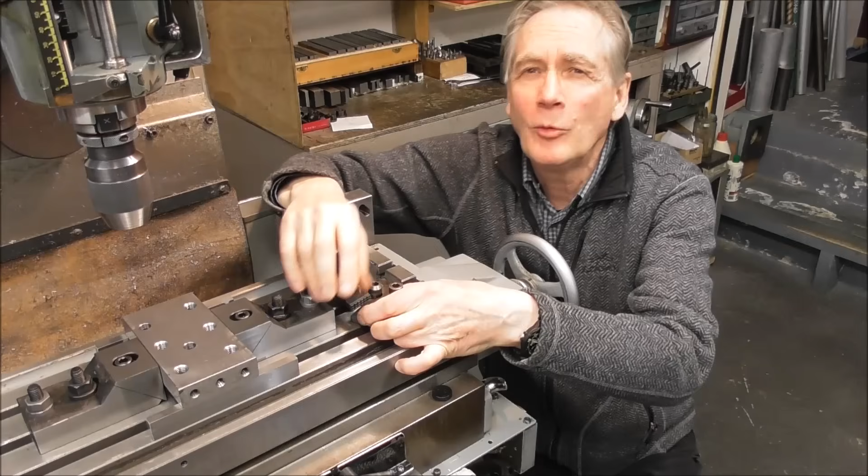In this video I'm going to go into making this edge clamp set or two-part vise. This one here, this was a previous one in a previous video. There'll be some machining tips and tricks, and you might be considering building your own. So follow me through the different stages of machining up these parts.

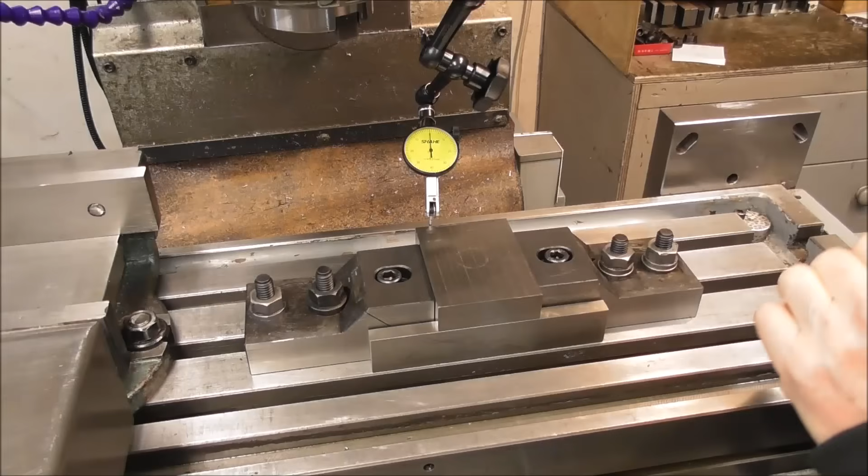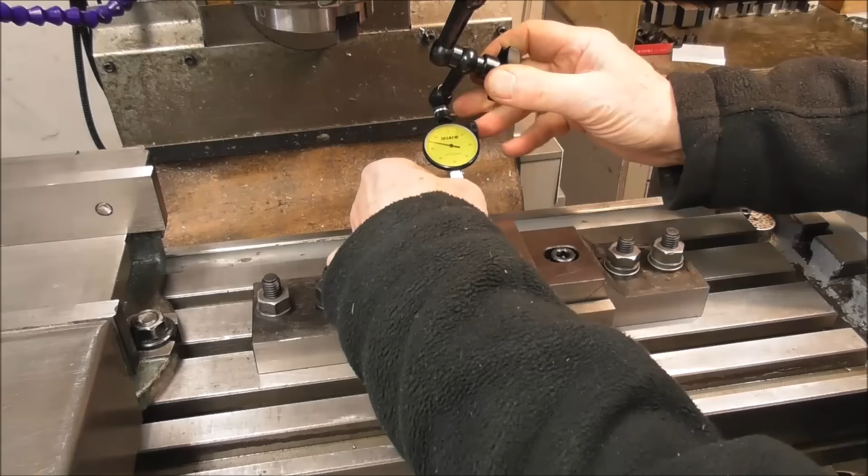Let's dial that in and test it. Yeah, so it's stayed square. It's really accurate, just like a conventional vise. What about pulling down onto the parallels? Well, I'm pretty sure that's going to be fine as well. Let's just stick that on 0. That's great.

Oh, I wish I'd made one of these years ago. I would have used it all the time. In fact, in many ways, it replaces a vise. There are a few situations where a conventional vise would be superior, but this is far more versatile. It can hold such long parts.

It holds the parts right down on the table if you want, so you've got more height under the spindle. It's just so versatile, and it pulls the parts down with both jaws onto the table or parallels. It's got all of those advantages over a vise, and it's accurate and holds really well. So I think it's fantastic.

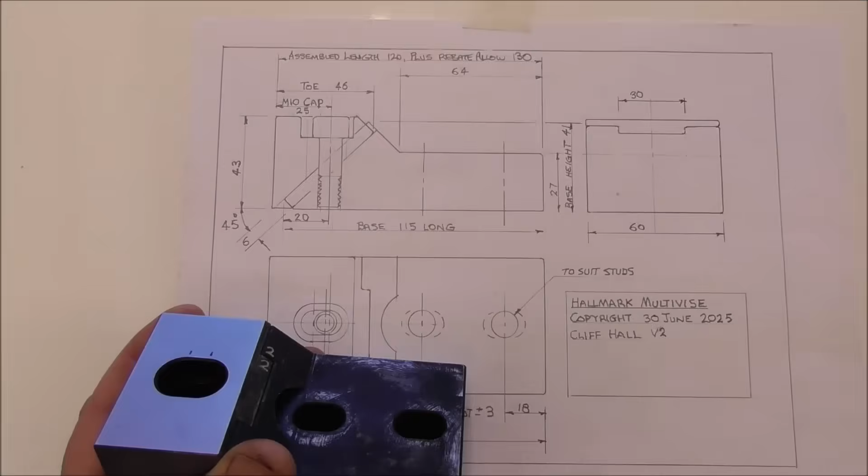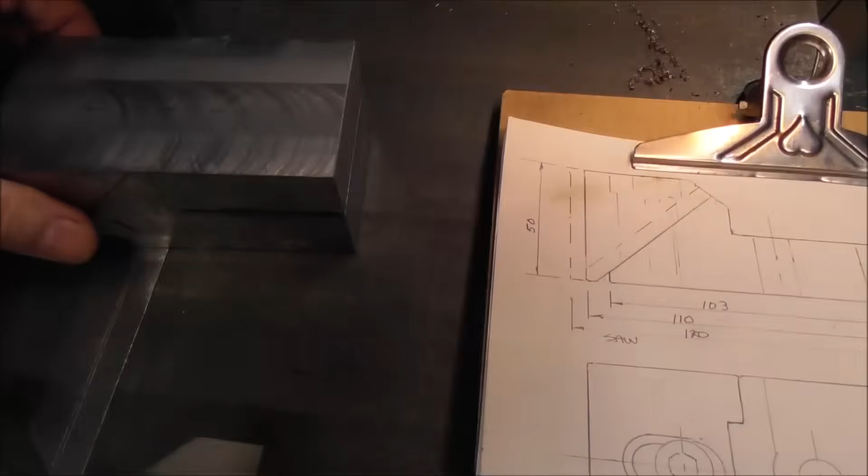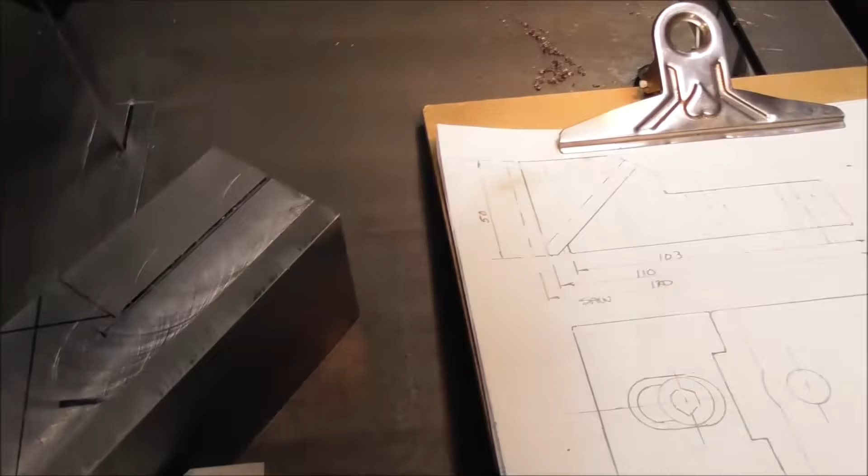So this is a nice easy part to quickly rough out. So you machine up 2 blocks of steel, machine them up with a fly cutter or a face mill into 2 square rectangular bricks, and then mark out with a felt pen the 45-degree angles. Then you can just bandsaw it, use a V block to saw the bevels until you end up with the 2 key parts, this part and this part, and then you have it all roughed out. You know, it's literally a really short, simple job.

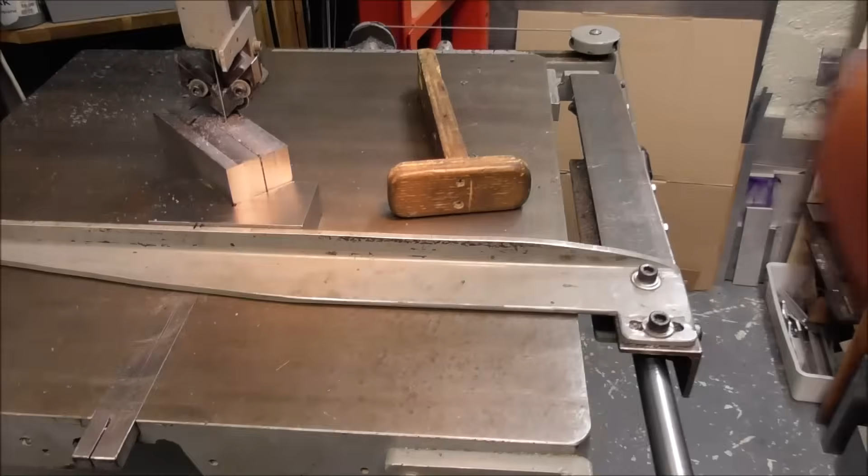If you don't have power feed on your bandsaw, it's well worth making one. It's the cheapest machine to automate so that you can go away and do something else while it's running.

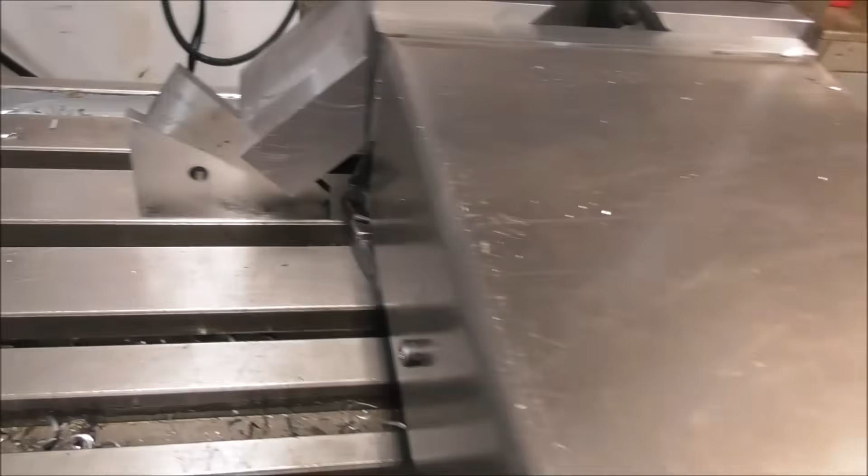This is a really easy way to hold the main bodies because it balances the chuck jaws, and you can set the angle based off the ends there with a 45-degree gauge. Just makes everything accessible, and you can machine 2 at once. I'll be able to also cut the rebate there in the top.

So that's the 6mm deep rebates cut in. So it's really straightforward because you can use your XY0 in the middle of the parts and then use the digital readout to get all the dimensions symmetrical, and there's virtually no measuring involved. So a nice quick easy job to get that all machined up.

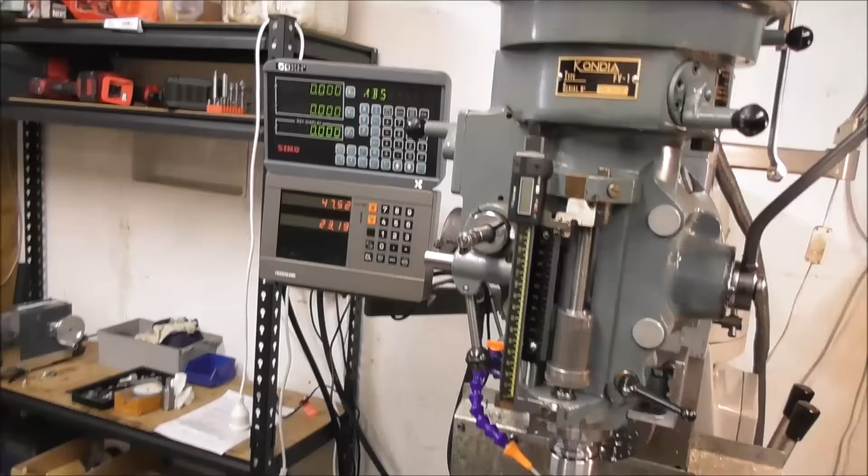Oh, this is good fun. But it looks like it's going to have to be put to one side. We've got another lot of tool making work just come in. No fun allowed. Oh well, back on the back burner.

So here I've just put in the holes for the T bolts at about 36mm centers. I've slotted them out a little bit just to make it a little bit more adaptable, and I'm using 7/16 Whitworth bolts, so that's about 11.8 clearance width slots or diameter holes.

So if you're going to cut these slots, because it's so deep, it's best to use the quill and vertical feed the quill, taking about 1mm cuts as you slot it out so that it doesn't overload the side of the cutter and cause you a chatter meltdown.

So that's how I set up the moving jaws, very similar, and again I could just machine them all to the digital readout settings, very little measurement involved.

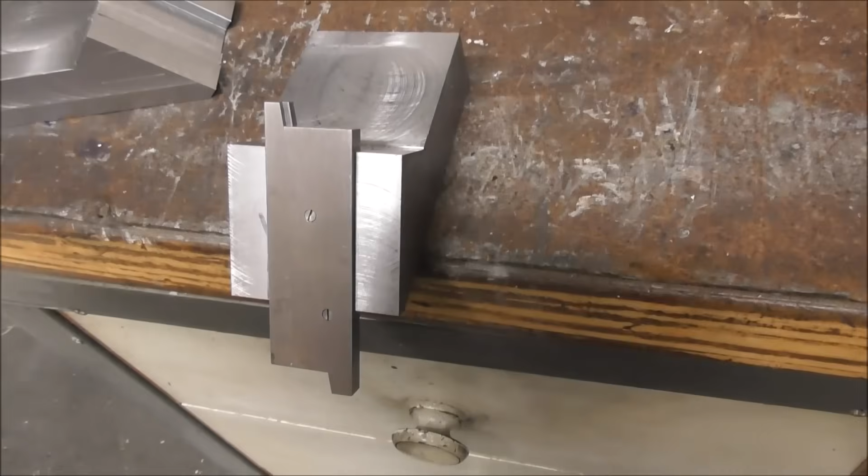Set it up at the 45 degrees based off a parallel there, and so the rebates, or tongue and groove if you want to call them that, the tongue is slightly wider to allow for grinding after heat treatment, and the groove is slightly narrower, just by a few thou, about 0.1 of a millimeter per surface, for surface grinding after heat treatment.

But if you were going to make these and you don't have a surface grinder or heat treatment, they would be almost as good made out of high tensile steel or P20 steel.

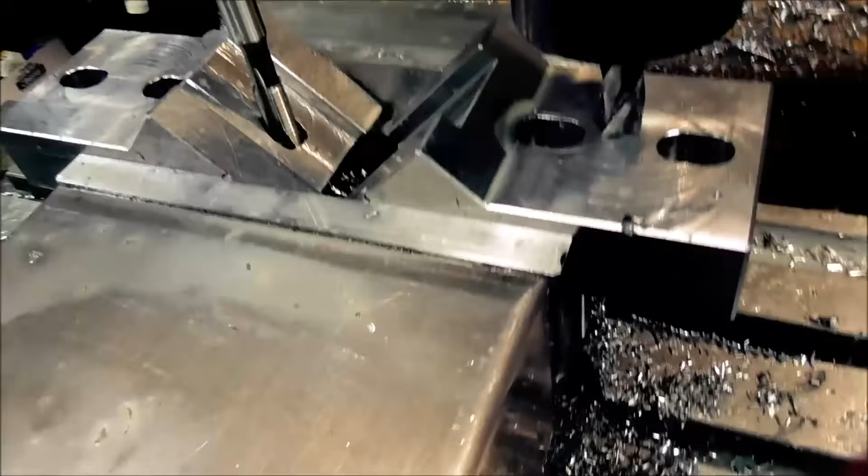M10 seems to be a fairly common thread for the cap screw to pull that sloping wedge block down. So just put in an end mill first to produce a flat, then drilled through the 8.5 tapping drill, and finally putting in this really short series guided tap wrench.

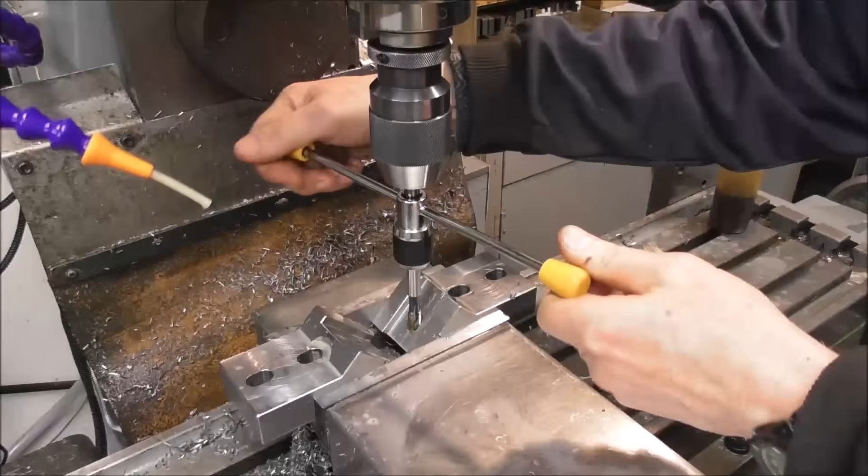Have a look at my recent video on the world's shortest guided tap wrench that just goes inside a drill chuck without winding your knee up and down very much. A very useful little tool. So there we are, a very short series guided tap wrench. Have a look out for my recent video.

So here I'm deep slotting a 10mm diameter slot, down 40mm deep. So I really have to use the quill on this one. I'll show you what I mean. I'll put the camera on the tripod and show you what I mean by sort of quill slotting.

So I'm going to offset 1mm at a time. I'm going to go with a 6mm long slot. So this is the first millimeter. Second millimeter,

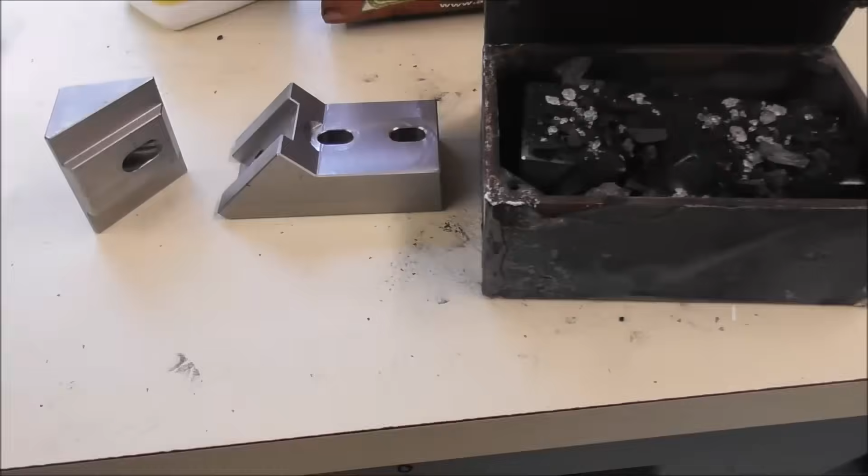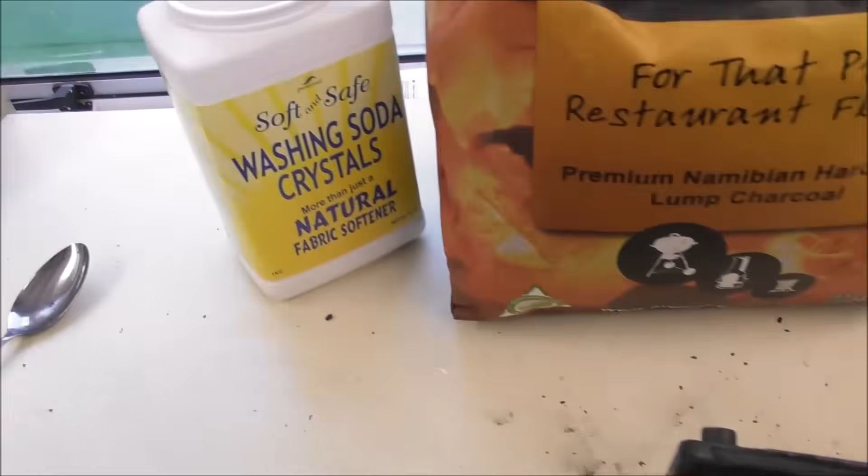Guided tap wrench. Okay, now I'm going to carburize these parts by putting them into this little box that I've made up, which is partially filled up with some crushed hardwood lump charcoal and approximately 5% of sodium carbonate in the form of washing soda crystals that acts as a catalyst. That doesn't have to be completely full.

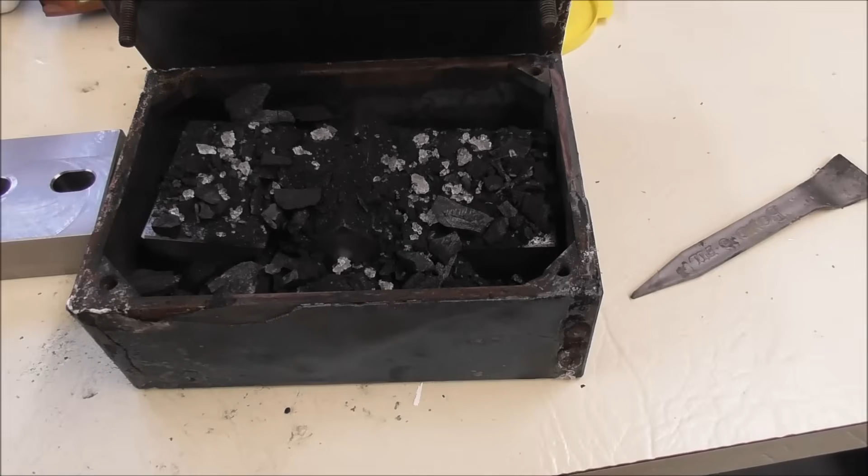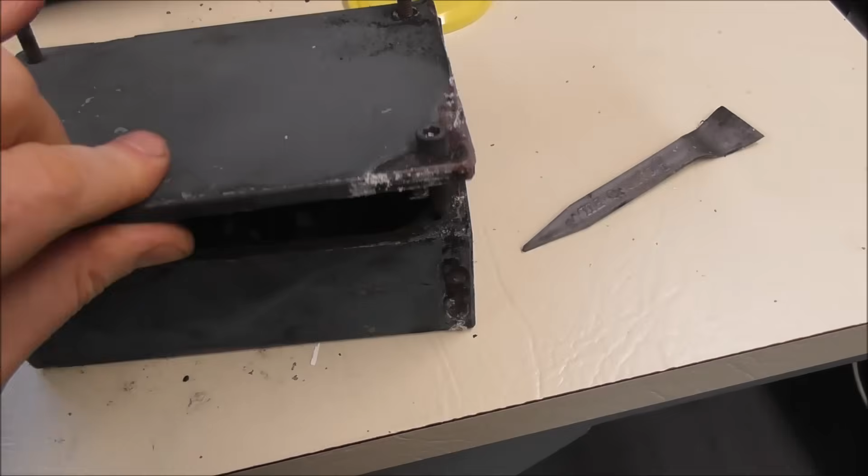I've found out from previous experiments that it very readily penetrates into the steel at about 880 degrees C, and I'll get in 1/2 mil deep within a couple of hours. I'll just screw the lid on. I don't even need to seal it. Have a look at my video, Case Hardening Mild Steel, where I go into all these different tests and experiments and find out what works really well.

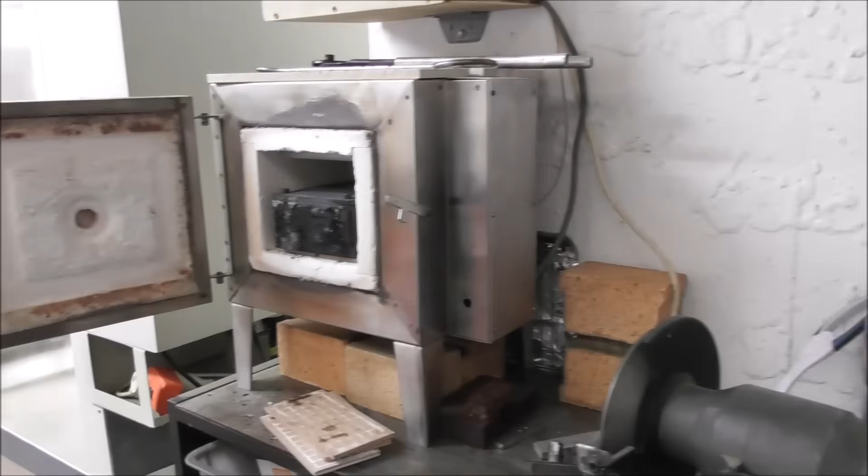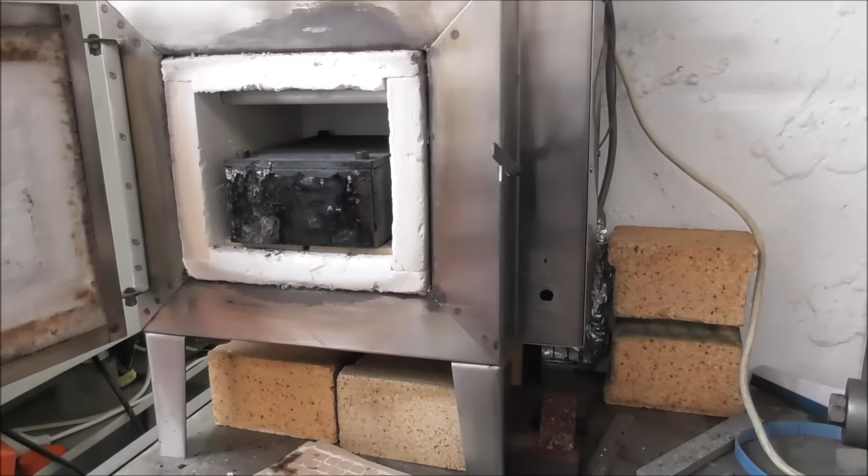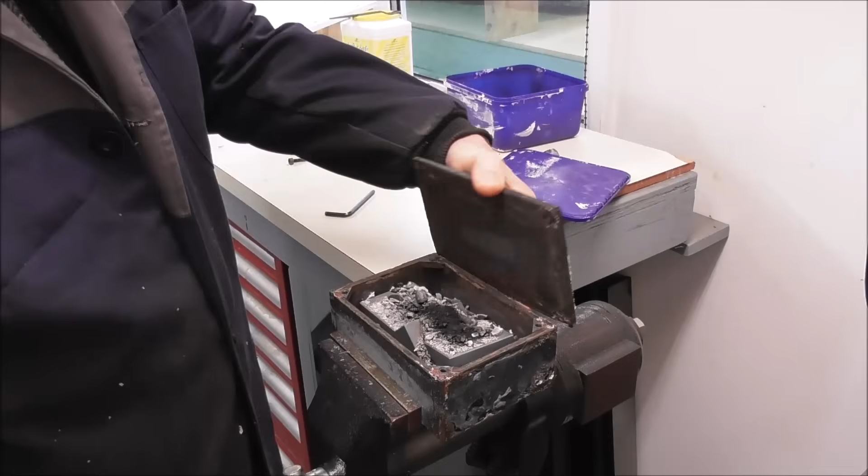So it takes an hour or two to get up to temperature internally there, and then another couple of hours of soaking to get the carbon in quite deep. And then I just let it cool down overnight and do the same thing tomorrow. Just a good little background project. And the next day it's cooled down. I don't seal the lid on, it seems to sort of weld itself on. I don't know how, whether it's something in a chemical process.

So that's carburized now. I know from my tests it goes down quite a deep depth, a lot more than 0.1 per hour. That'll be 1/2 mil to 1 mil deep carburized steel. And I'll do the other ones now. I better put new chips and catalyst in there just in case those chips are spent.

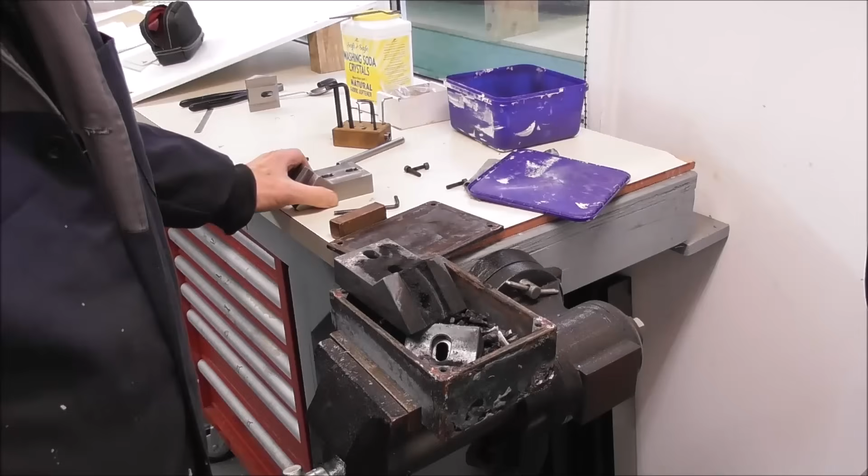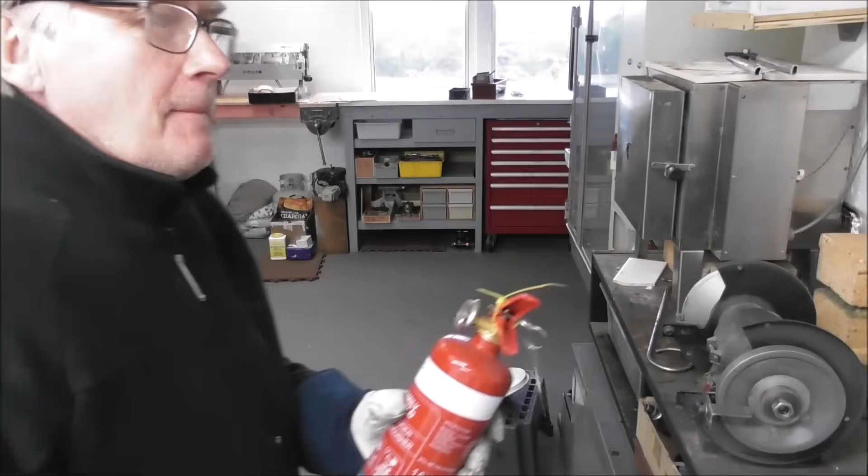So then we'll repack these parts and carburize these ones, and then I can heat them up to a lower temperature and quench them in oil and harden them, and then the final stage is to temper them. I'm a little bit concerned about this. I've got my fire extinguisher ready

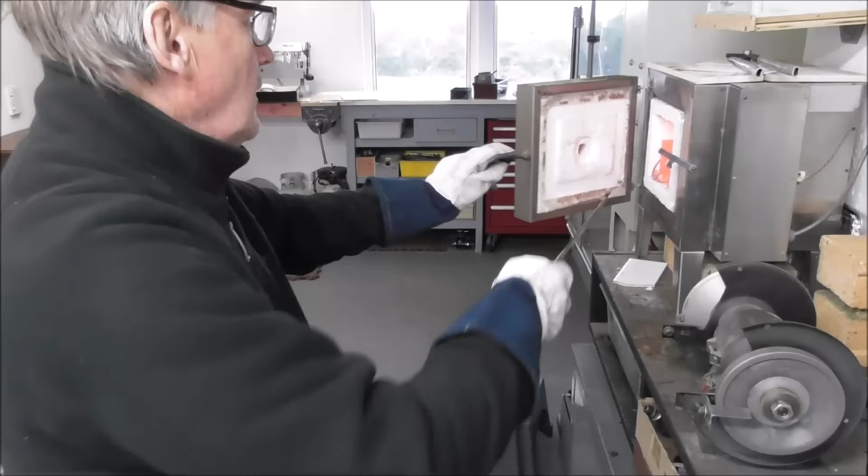because at the bottom of the oven the tile has broken into little pieces. I really need to get a replacement tile, and when I drag the big heavy parts out, I could send the red hot tiles firing in all directions, and that could be a fire hazard. So wish me luck. Oh God, that's heavy. Well, that one went okay.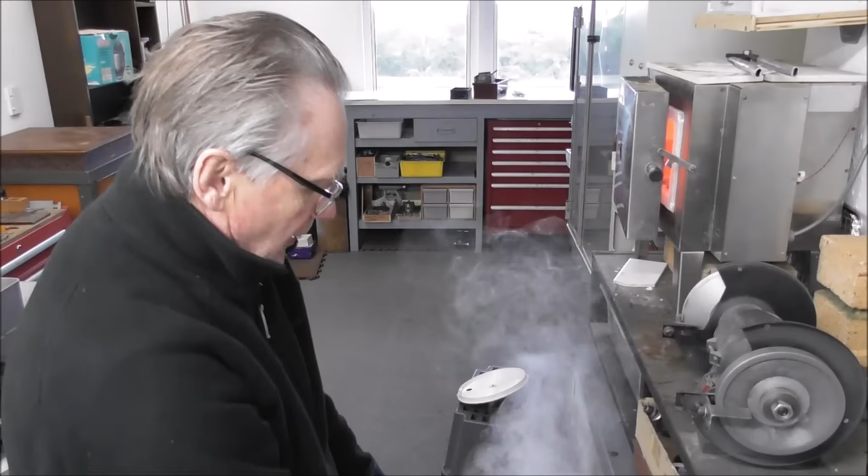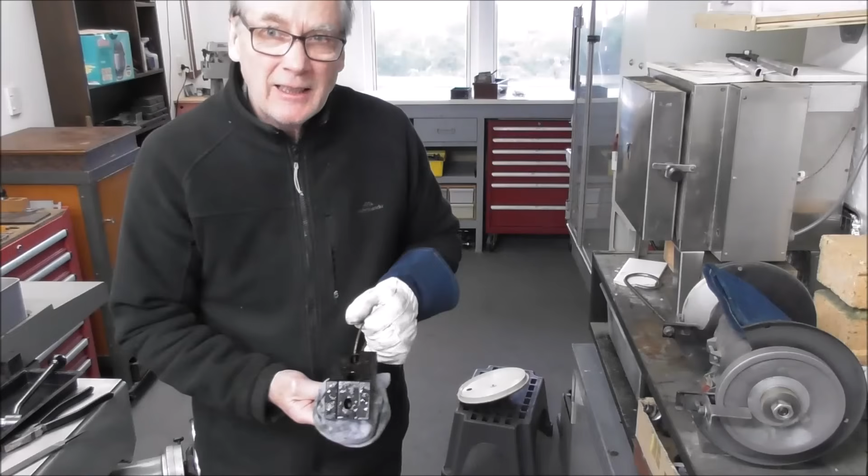So 800 degrees, big block of steel into canola oil. We'll see if that goes hard. So hopefully that's gone nice and hard. Oh, that doesn't feel hard, that feels soft. How did that happen? Damn, first time I've had a failure.

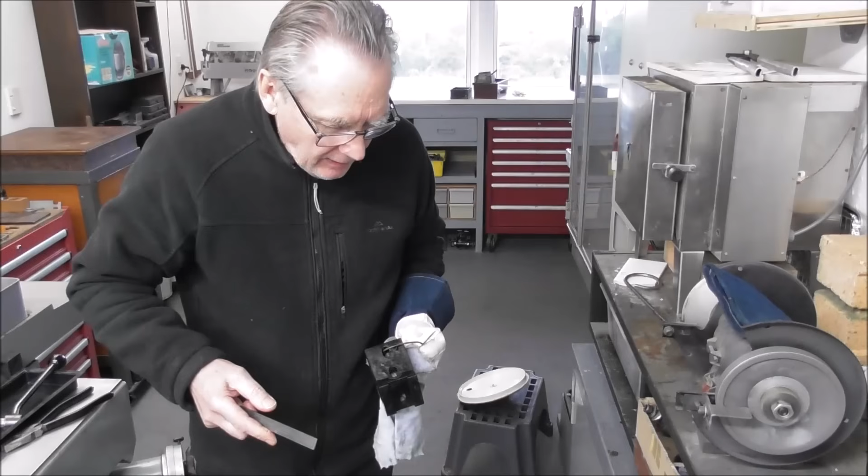I'll test it a bit more carefully with a center punch. It might be hard. I don't think it's glass hard though. Yeah, checked it with the center punch. It's sort of hard on the very thin edges, but generally speaking not hardened.

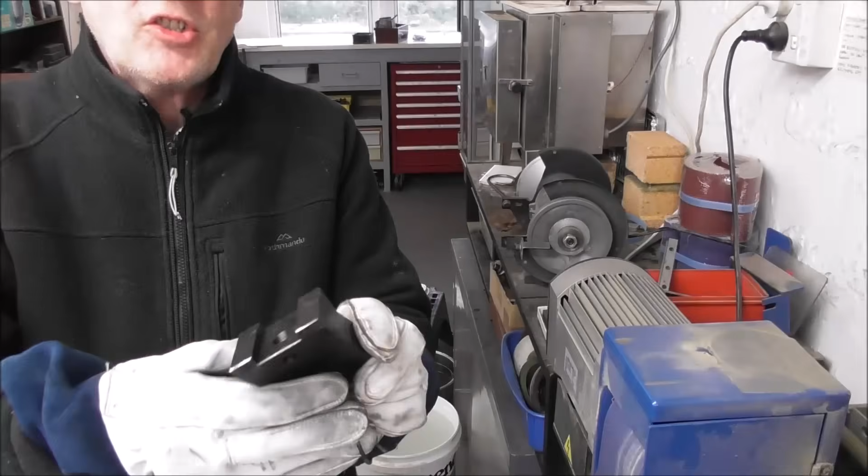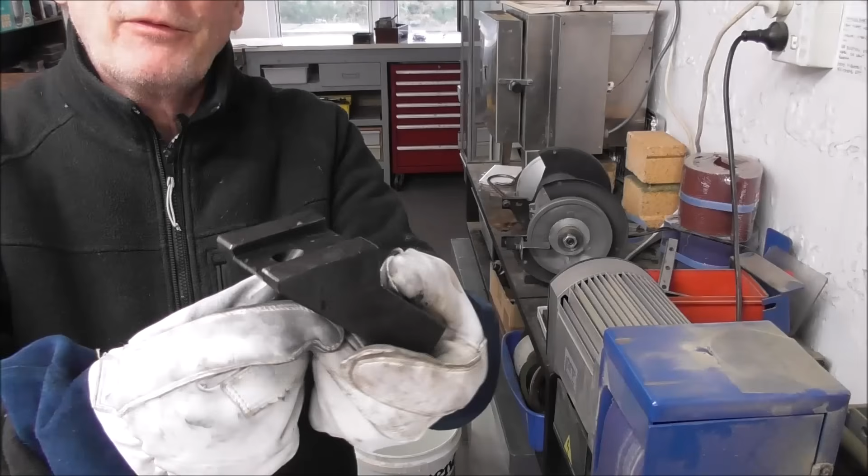And that's really weird because I used exactly the same process as my tests, if you've seen my video, case hardening mild steel, where I do different trials, but this time it didn't work, and the only reason I can think of is that it's such a big block of steel that in the canola oil it just didn't get cool enough quick enough to freeze it in that hardened state.

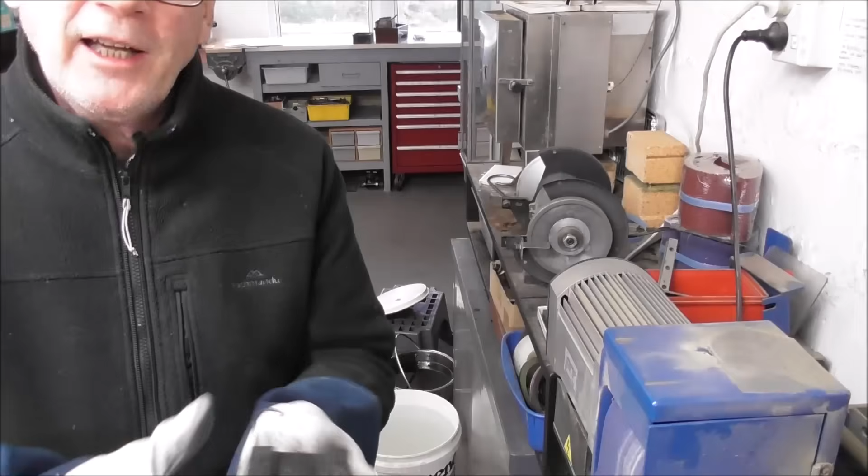And so I'm going to try the next one into salty water, into brine, which is a much more severe quench, to see whether that makes a difference and hardens it. This may just have been too gentle a quench for the size of the block.

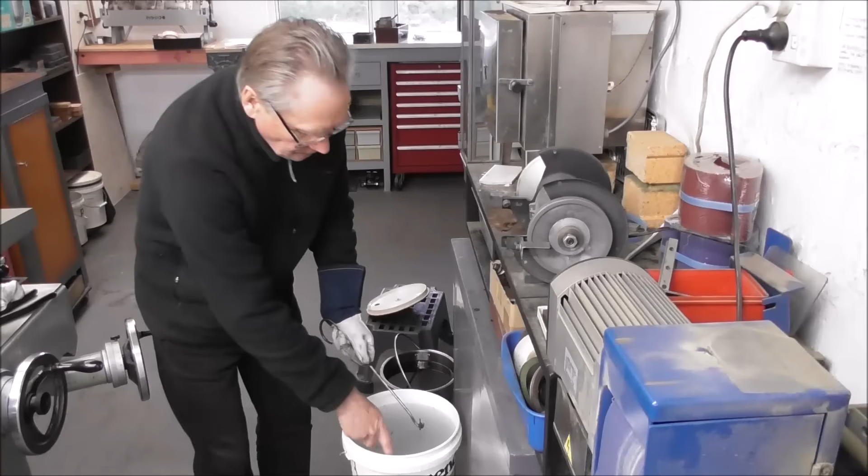Well, that was a lot more severe. So, yeah, whole 10 litres of water's got hot. And it's cooled down much more quickly. So let's see if that's made the difference. Yeah, that's hard. That's glass hard.

So that's really interesting. Obviously, there's a certain size of block that's just too big for canola oil, and it won't cool it down quick enough. It holds enough heat to make too gentle a transition and not harden the steel. Well, I guess I've got to redo that first one again.

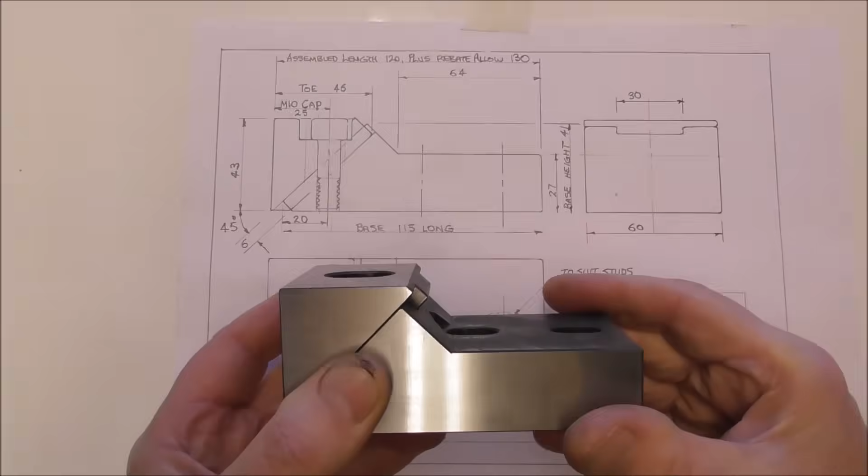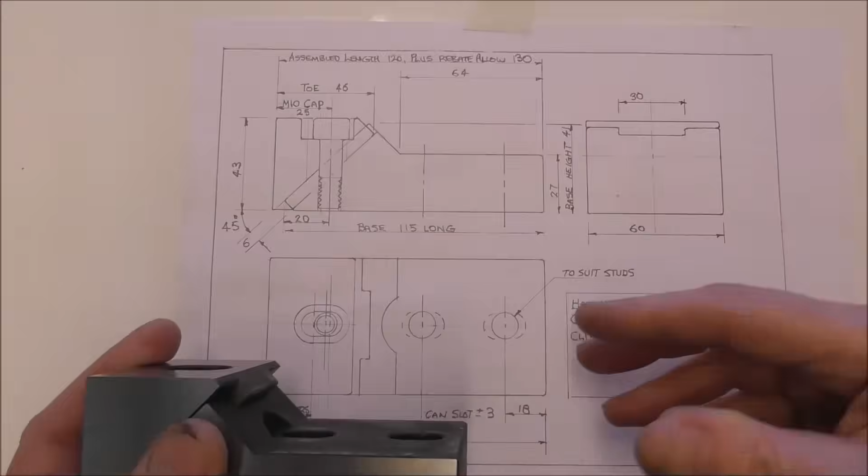Okay, well, should we go through the drawing? So you can see I've done an old-fashioned drawing here. I've got CAD software, BobCAD CAM, which is great for CAD and CAM, but it's not set up well for doing technical drawings and PDF output at all. So it's easier for me just to do an old-fashioned drawing board drawing. So I've refined and optimized some of the dimensions over this version 1. So we'll call this drawing version 2.

Shall we call this the body and this the toe? And we'll call the product the Hallmark Multivise.

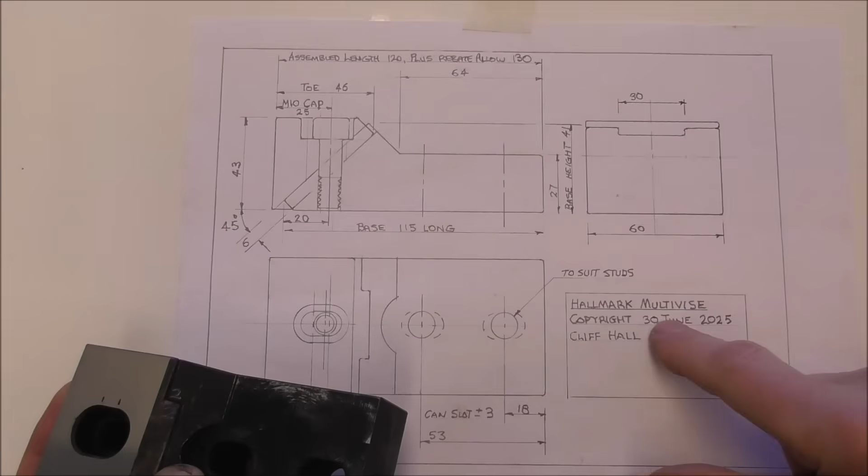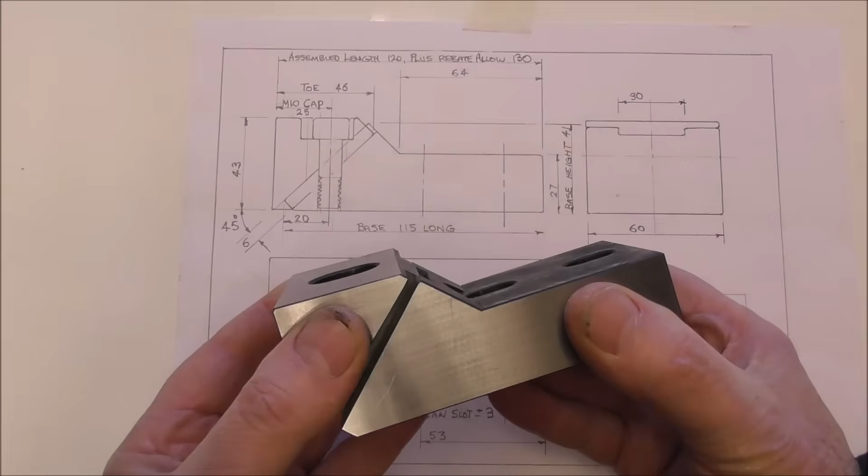Okay, so let's go through some of the materials here. So obviously you want to make it out of steel. I've made this out of mild steel and then case hardened it, and there's going to be another video going through making this product. So look out for that video. It should be out already. If not, it's not far away, going through machining it up and heat treating it.

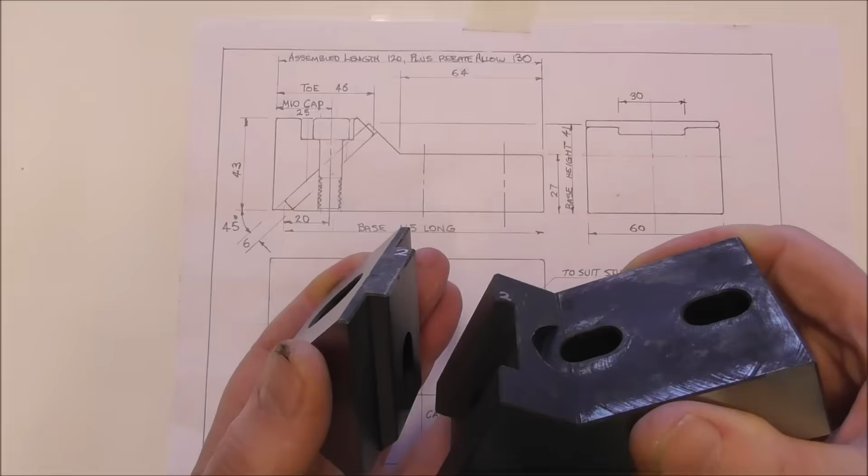But you might not want to heat treat it. You might want to make it out of mild steel, and you could do that. You could machine the tongue and groove fit there with a very close fit, which is a really good idea, and put some anti-scuffing paste on it so that it doesn't wear there.

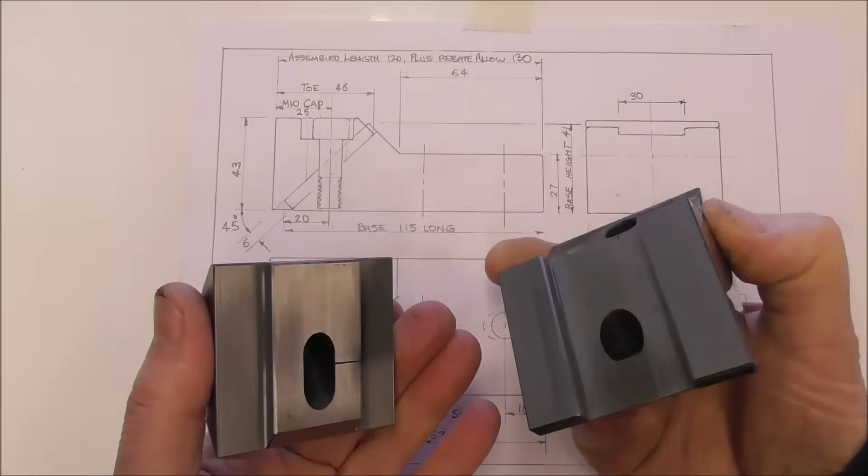You could also machine it out of high tensile steel or P20 steel even, and send it away to your local heat treatment company and get it nitrided. That would put a glass hard skin on it, or just make it out of high tensile steel, make it a close fit, and put anti-scuffing paste on those rebate slides.

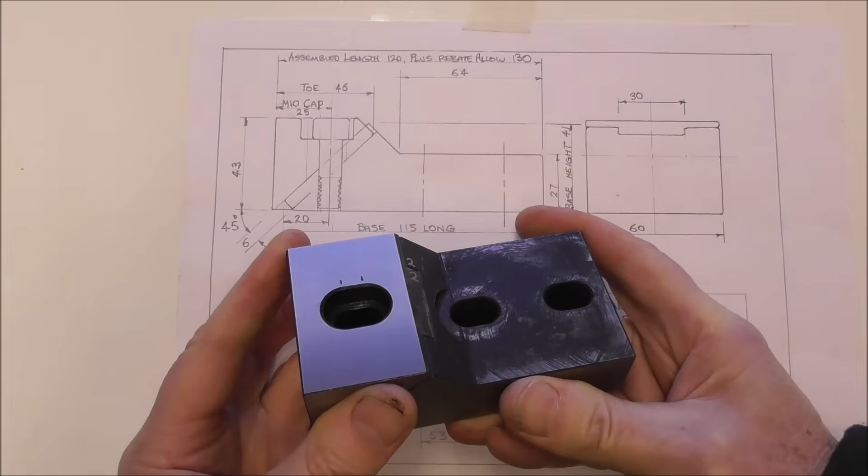You want to make that tongue and groove a really close fit. As I explained in the video, any play there can relate to it moving or losing its position, losing its stiffness, losing its accuracy. So make sure you have a look at the build video, which will go through the machining tips and tricks as well. Okay, so let's go through some of the details here.

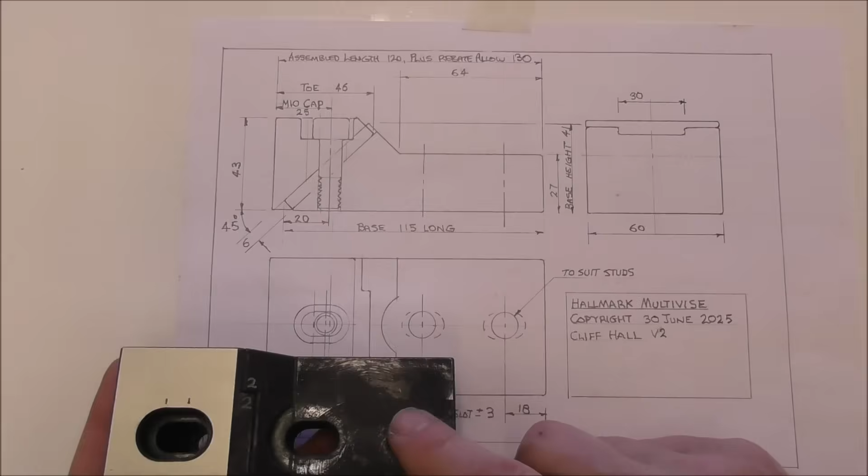So these holes, the centers are outlined here. Drill those holes to suit the studs of your milling machine. You know, that may be 10 mil or 12 mil or 3/8 or ½ inch or whatever. These are 7/16. You could slot them out to give you a little bit more versatility of positioning.

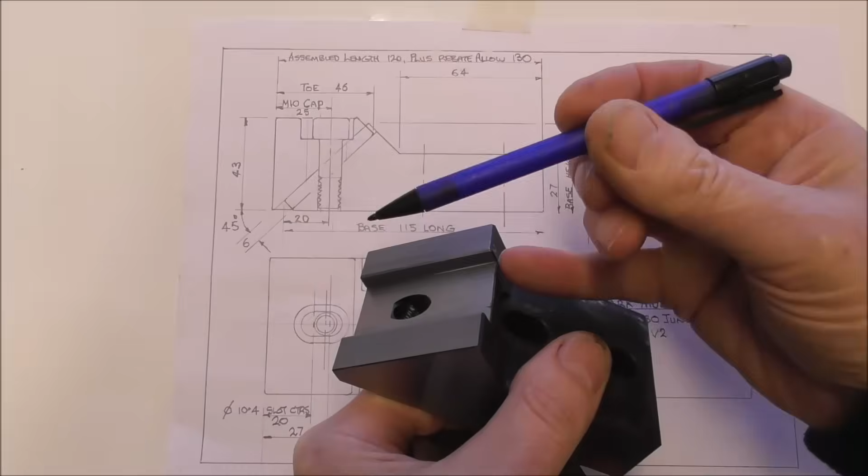And then this front cap screw here, position, that's a bit tricky, so have a wee think about this. So based off the position I've optimized, I've brought it back up the slope a little bit to give a bit more depth of thread there. And so the position of it from the end of this block, the base, to here is 20 millimeters.

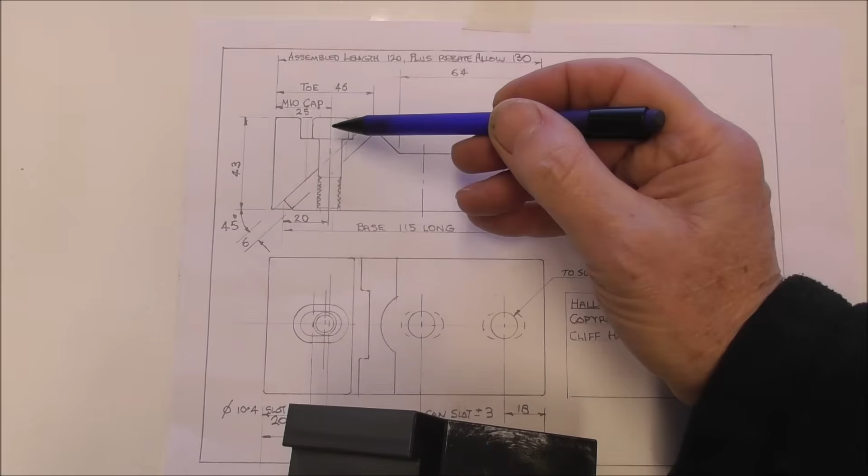You want to machine a little flat to start with, and then drill and tap, say, an M10 thread for an M10 cap screw, 20 millimeters in from the end of the base. And the corresponding dimensions for this slot: from this end, you're going to come into two different centers, one at 20 millimeters and one at 27 millimeters.

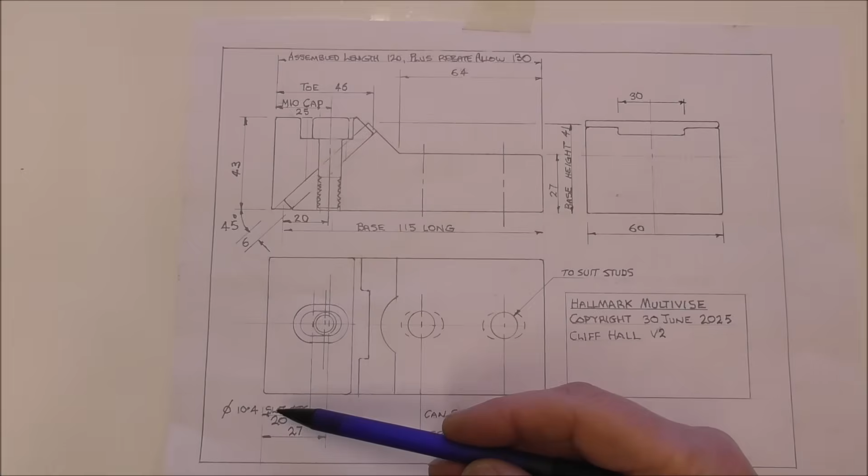That's them there. A little bit of clearance, say 10.4, and slot that out, and a bigger slot in the top to take your cap screw, clearance on your cap screw down, for example, 10 millimeters deep. So they're the key dimensions for the position of that cap screw for operating the toe.

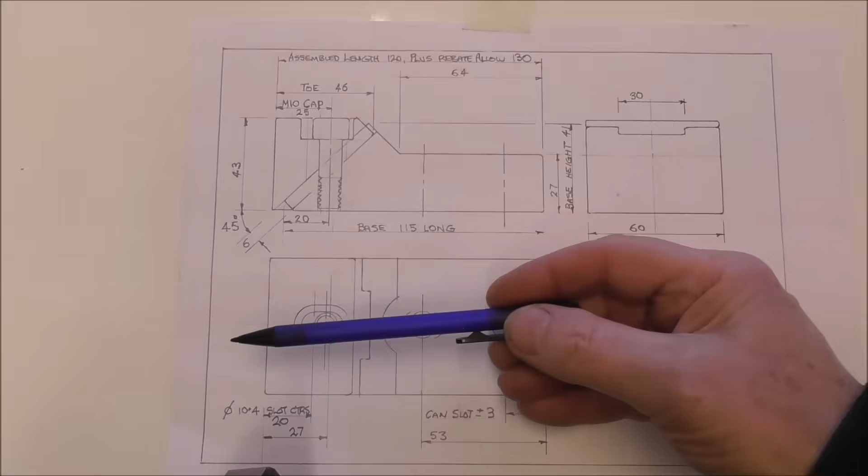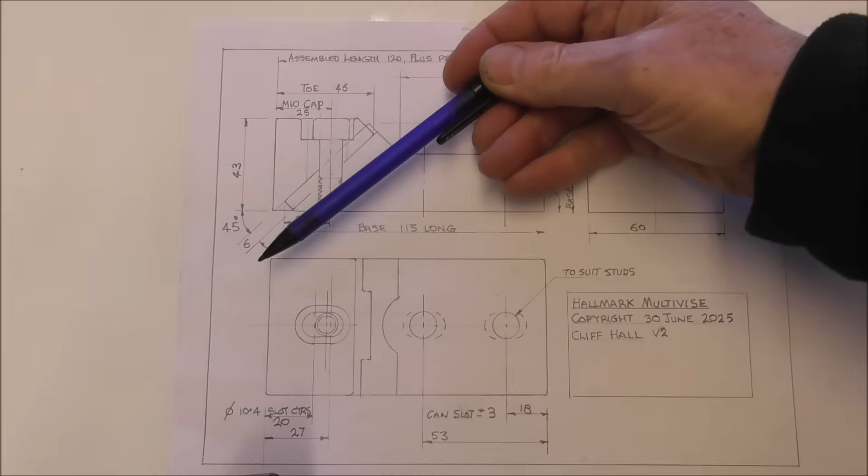When you make these, you'll see on the build video that if you make a big brick the size of the toe and the base, you make it a bit longer. So the overall length of this assembly is 120 millimeters, but if you made it 130 or even a little longer, 132 millimeters long, then when you saw it off, there's enough material left in there to cut the tongue and groove rebate out, and it will return back to the final assembled length of 120 millimeters.

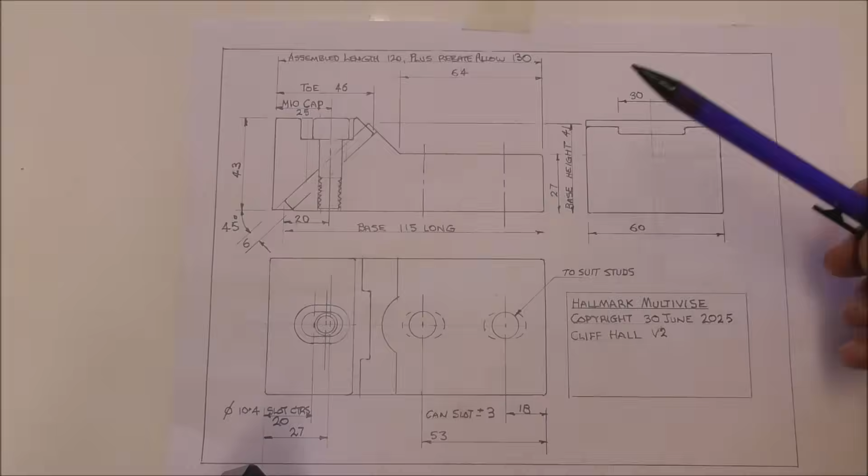So you need a block of steel at least 130 millimeters long by 60 wide by 43 high. Obviously you can change any of these dimensions if you need to suit your particular situation or material that you have on hand. So that's most of the details there.

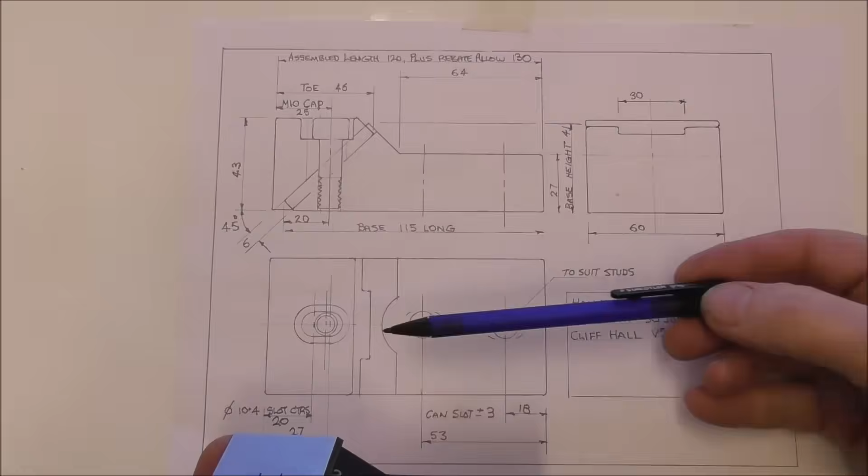Because I have changed the dimensions slightly to try and further optimize the design for this version 2, I haven't prototyped it exactly. There may be a clash or an error issue, so please check everything as you go. Let me know if there are any issues. It should be okay, but just be aware that this is an unprototyped, refined design.

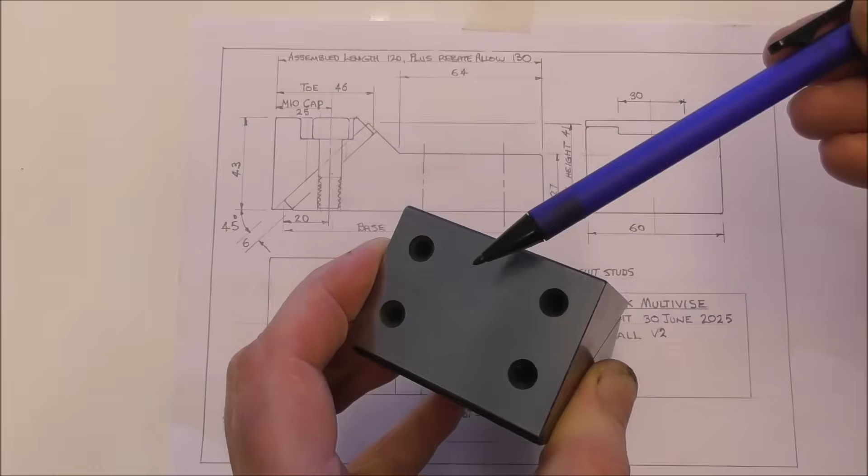On the toe, I put some threads in here. Especially if you're going to harden it, I would put threads in there in advance of hardening it so that you can screw vise jaws on. You might want to do that in the future. You could have soft jaws screwed on the end of the toe, serrated hardened steel jaws, or V jaws so that you can hold a round part.

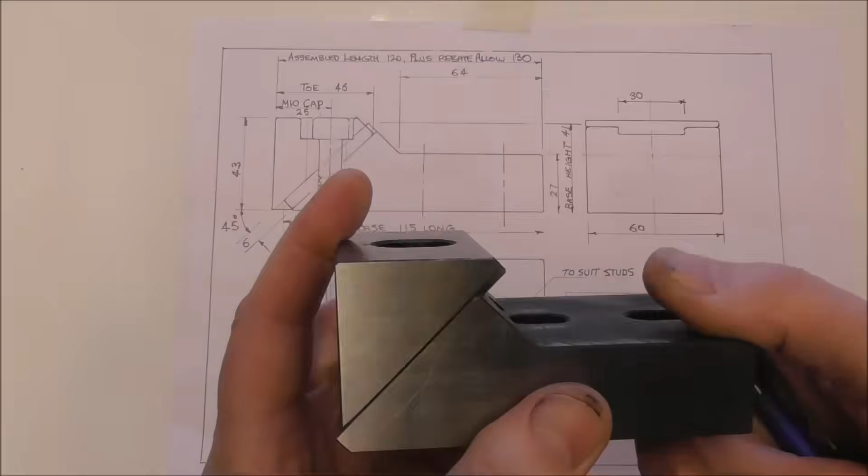Or another option, if you're making these, is to make it out of tool steel like O1 steel. Get a block of O1 steel and harden it. That's much easier to heat treat than case hardening mild steel. You just heat it up to the temperature and quench it and then temper it. But I think a lot of you are probably going to want to make it out of mild steel or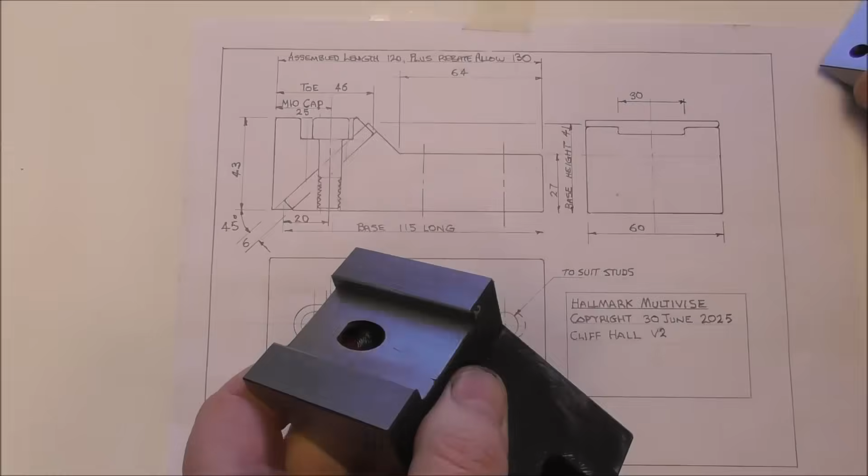high tensile steel. So make sure when you cut this rebate here that you use a very sharp cutter and get a very close fit. You could even lap or stone the last little bit so that you get a really close fit there. That's important. Another thing to consider is I've got the tongue in the toe and the rebate in the base.

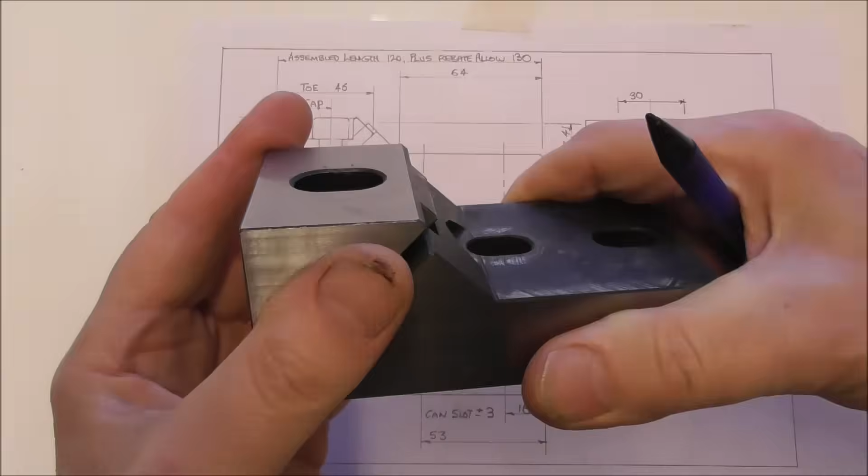Now you could do it the other way around. I have deliberated over this a lot, and there's pros and cons either way. Think about that. You might want to change it. It might be better to have the tongue in the base. I'm not sure. If you're not sure, you're probably safer to stay with this current orientation, because at least we know this works.

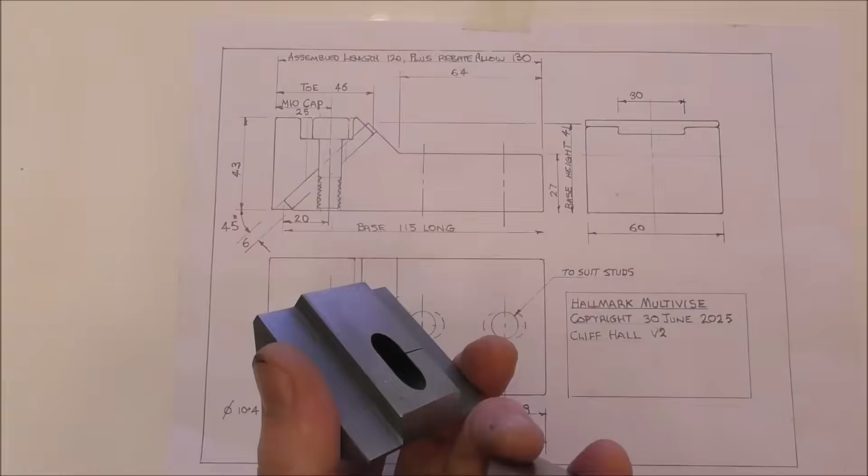It gives you a little bit more depth under the head, which is a good thing, but it gives you a little bit less thread depth, which is a bad thing. There's pros and cons in everything in life, isn't there? So hopefully that's covered it basically for you there. So have a look on my website, Hallmark Design, for the PDF and print that off.

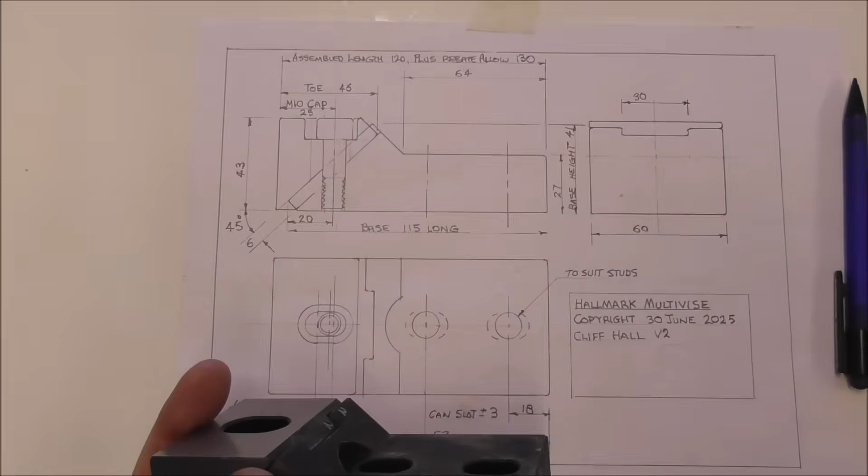So thanks for watching that video through to the end. You probably noticed I didn't include the surface grinding because most folk don't have a surface grinder, so you could finish machine it on the milling machine.